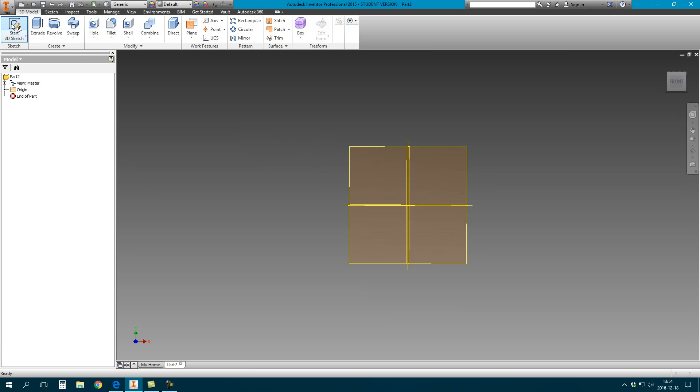But today we're not going to be making a drive shaft, we're actually going to start making our piston. The first thing you want to do is create a new object and choose standard millimeter, just like we did previously. Once you've done that, we're going to start making a new 2D sketch. Just choose any plane you want. I'm going to choose the XY plane, because it might be easier that way. It won't make much of a difference though.

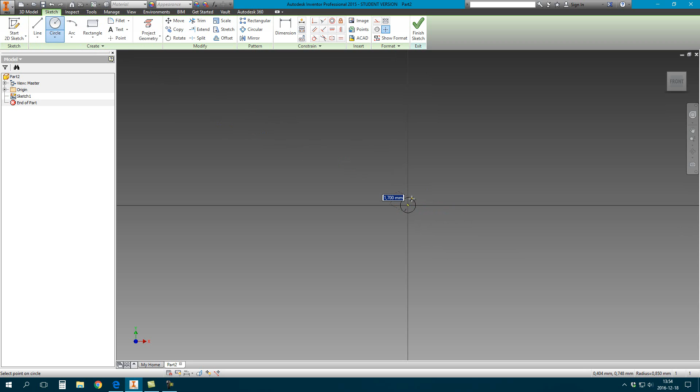Now we're going to start making the actual sketch for this. The first thing we're going to do is make a circle from the center point, and type in 20 millimeters as the radius. Then we're going to make another circle, with this one having 34 millimeters.

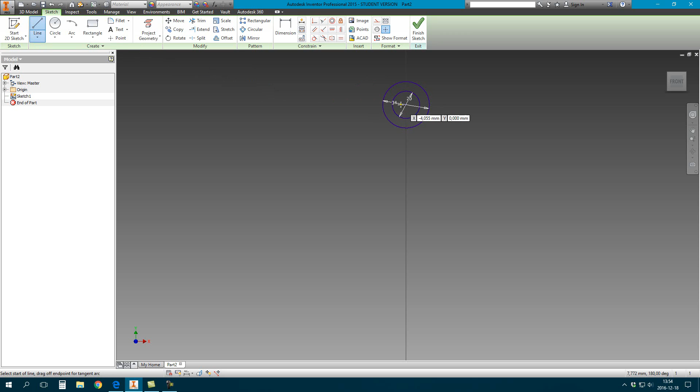Next, we're going to make a line straight downward from the center point of our circle. Choose the line tool, click the middle of the circle, put it straight down, and type in 170 millimeters. Press enter.

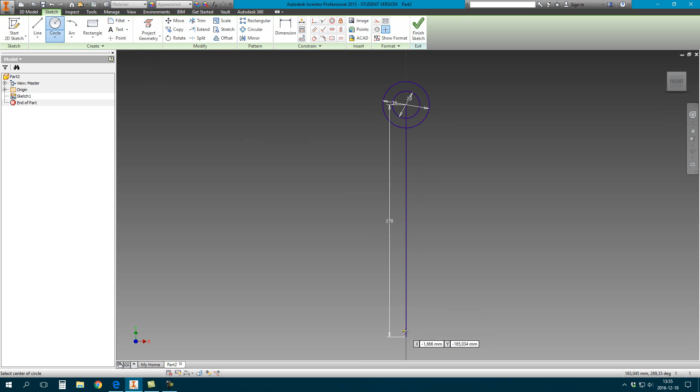Then we're going to make two more circles from the bottom of this new line that we just made. The first one is going to be 40 millimeters, and the second is going to be 60 millimeters.

Next, we're going to be adding some details to our sketch to make it appear more like the final project we're wanting. So first, select the line tool.

Then try and snap it to the very edge of the middle of the bottom circle. You can also type in the coordinates manually, of course. But once you've done that, draw it straight up and type in 20 millimeters. Then draw it to the side and try to snap it to the circle. It might be helpful to zoom in while doing this to make sure you've actually gotten a correct snap. A correct snap is achieved when that icon, which I'm demonstrating now, is shown and you have 90 degrees. Just click.

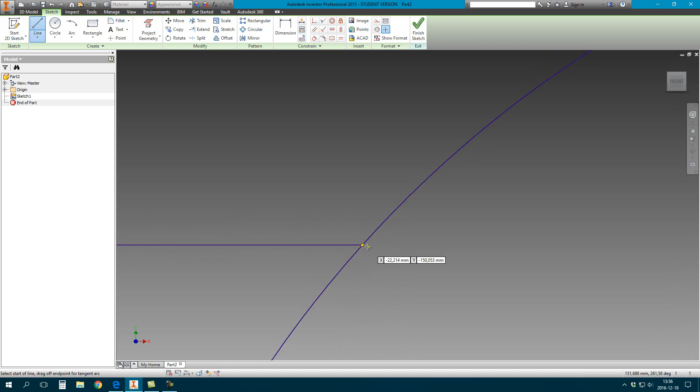Then we do the exact same thing except on the other side of the circle: 20 millimeters straight up, draw it to the left, and snap it.

Then we're going to add two more lines, and we're going to make these straight across the center between the two circles. So one there and one there. Make sure it snaps. And that gives us all the lines we need.

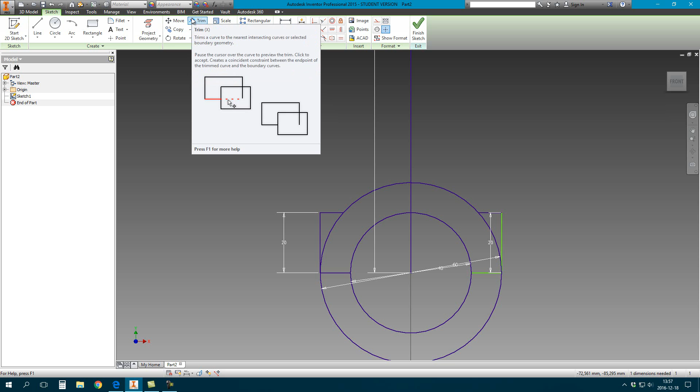Now we're going to be using the trim tool, so select that now. Once you've selected the trim tool, simply select the two lower arcs that I'm indicating. We're then going to remove two more arcs, namely the ones inside the sort of boxes we just drew, the ones I'm indicating right now.

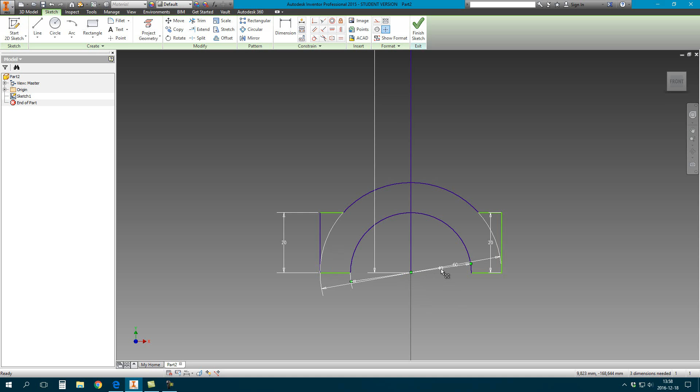Now, you might notice there are still white lines where we used trim. Don't be alarmed, because these are only the actual dimensions being shown here. So what we can do is pull these out of the way to get a clearer look at how our part looks. It's often a good idea to pull away the dimensions from time to time to make sure you can see properly.

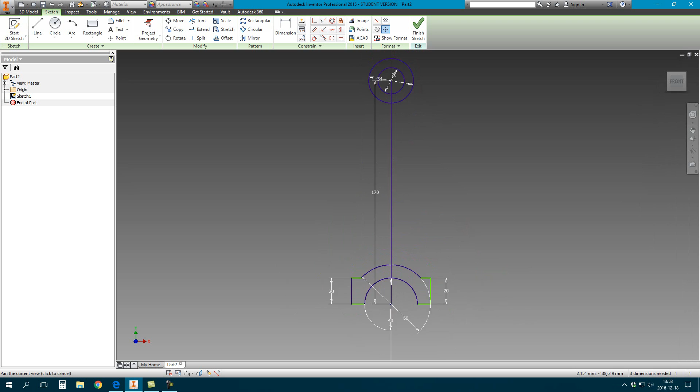Now we're going to add some more additions to this sketch before we're completely finished. To do that, we select the line tool, and then snap it to the center circle, straight in the middle of it, on the top one.

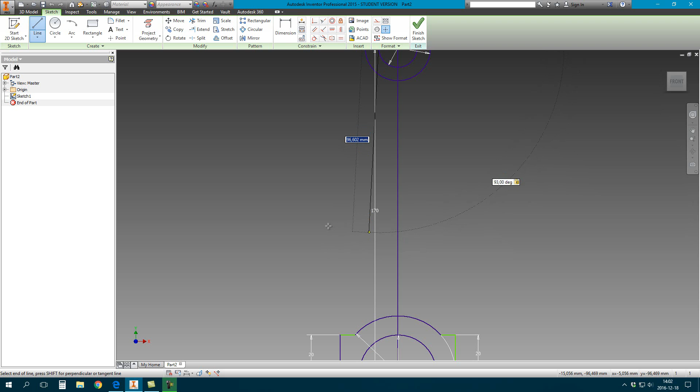And then you type in 93 degrees as the angle. Once you press Tab, you realize it is now snapped to 93 degrees, which is exactly what we're looking for here. So now put it all the way down until it snaps to the lower circle.

Might help zooming in to realize if it snapped correctly. And then just place it right there. Press OK to deselect the line. There we have the first line we need.

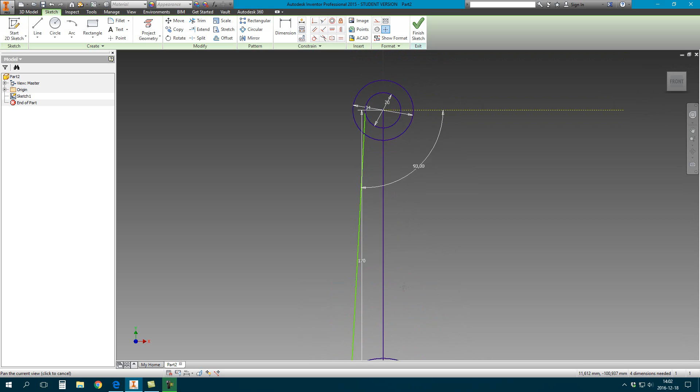We're gonna add another one on the other side of it, which looks identical. So select that. But you'll realize that if you type in 93 degrees, it won't actually give you the result you want, because now it will be 93 degrees in the same direction as the first one, meaning we've created parallel lines, and this is not what we want. Instead, you're gonna have to be calculating in the other direction. So you're gonna need 87 degrees.

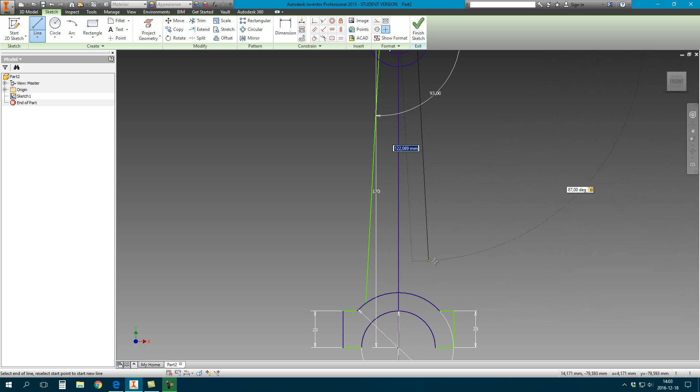And there we go, now it works perfectly. So just snap that to the line as well.

Now we're almost finished with the initial sketch that we need. First, try and pull away all the dimensions that are in the way, so that you can get a clearer look on how everything looks. Some of these cannot be moved, but most of them can, so try and move those out of the way.

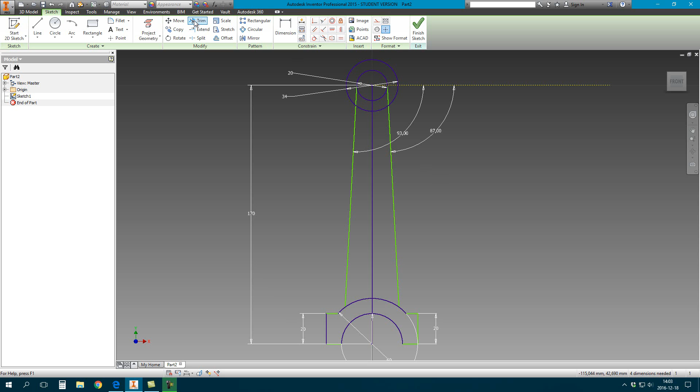Then we're gonna select the Trim tool again, and start trimming away the last lines we don't need. So just try and trim away all the lines that I'm indicating here.

Including the center line. We might actually have left that, and it wouldn't really have hurt anything, but it's good to remove the lines you don't need. It's good practice, really.

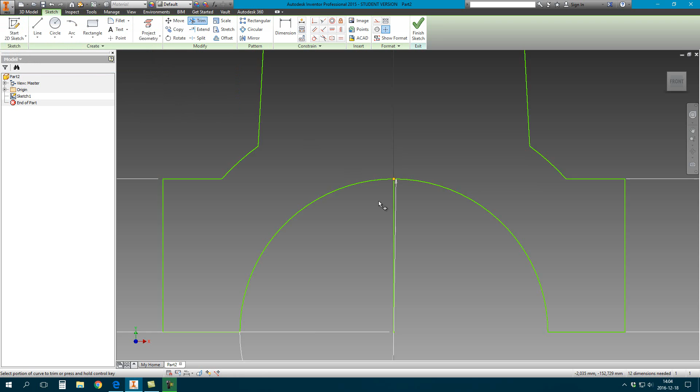Now you'll notice that when we tried to delete the last line, it said that it has a dimension on it. And this is the problem we encountered in the previous video. It simply means that we have a dimension on this exact line that we can't just remove via the Trim tool. So what we're going to have to do is try and find which ones are actually linked to this specific line.

And in this case, it's this big one here, because it goes from the edge of the small green line to the top of it. So that's the one we're gonna need to delete.

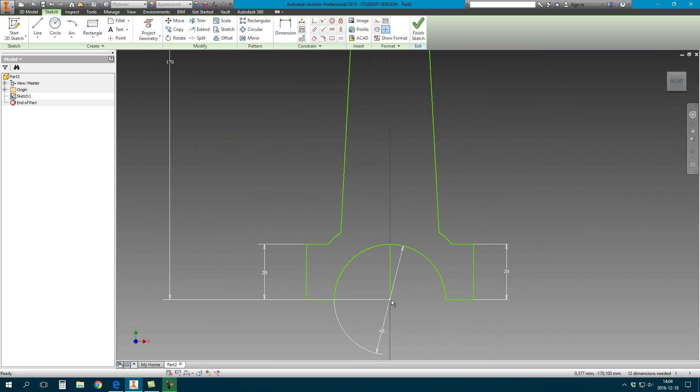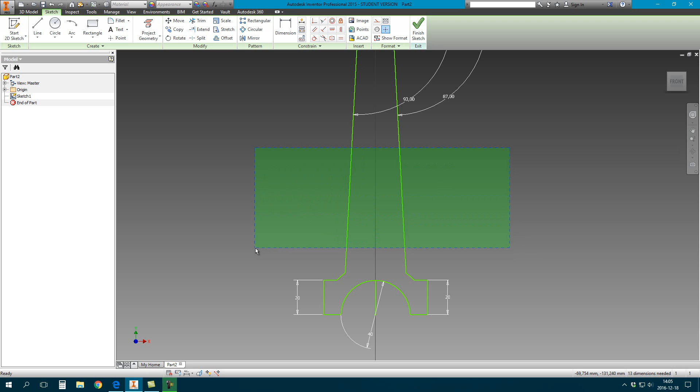So we go up, we select the large one. Oh, and by the way, this is an important fact: when you're selecting things, dragging to the left will actually select things, while dragging to the right will use a separate sort of selection mechanic that doesn't select most things. For example, it doesn't select lines if you draw to the right, as I'm trying to indicate here. However, drawing to the left will select these lines. It's important to keep this in mind when trying to select things.

Now we can use the Trim tool and remove that last bit of line that we wanted removed. We're then done with the actual initial sketch that we wanted, so we can just press Finish Sketch.

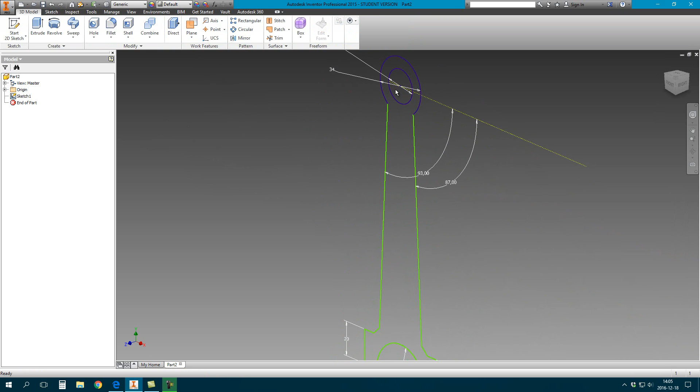We will then want to extrude this, so choose the Extrude tool, just like we did in the previous video. And select the entire shape we have. You'll notice we don't actually have to click on several shapes because we've trimmed away all the unnecessary lines. And then we type in 20 millimeters.

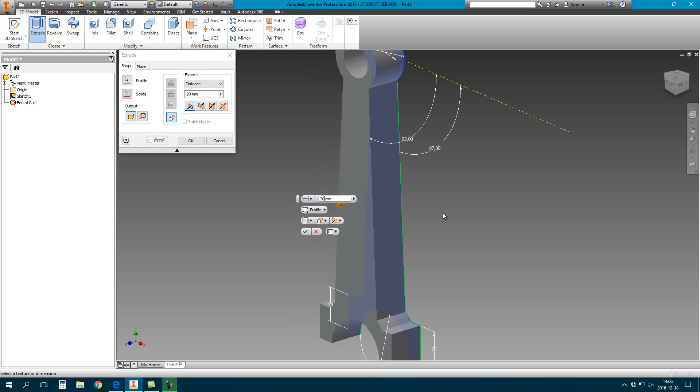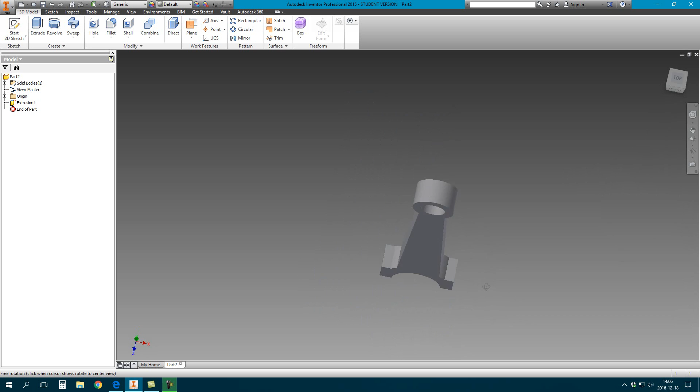Now we are actually finished with the main part of this piston, or actually the main part of this top half of the piston. We're gonna make the other ones as separate parts, so we don't want to worry about those right now. But there is one big feature that we're actually missing: we want screw holes on this.

So we're gonna make a 2D sketch. And then we're gonna select the planes that I'm indicating. And then we're gonna project both of the planes that I'm indicating here.

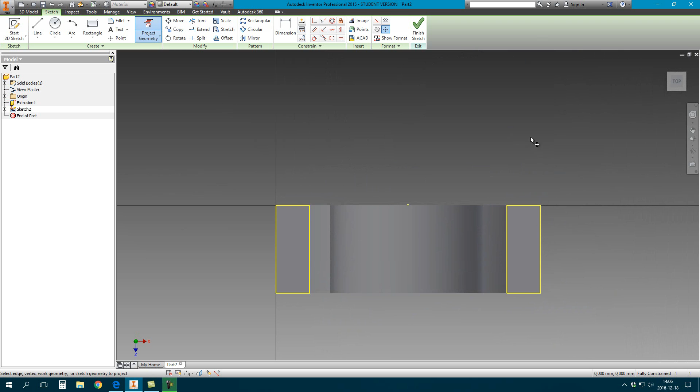We are then going to draw a line, so choose the line tool now. You'll want to snap this to the center of the left side line. And then we're gonna make a line that is 5 millimeters out. Here I'm just trying out some different measurements to see what fits best, but 5 millimeters fits best. So do that.

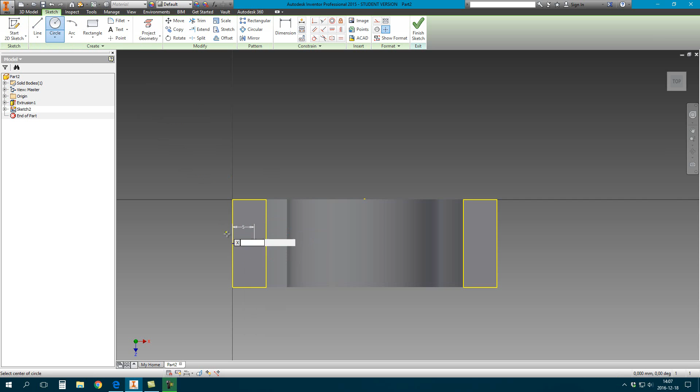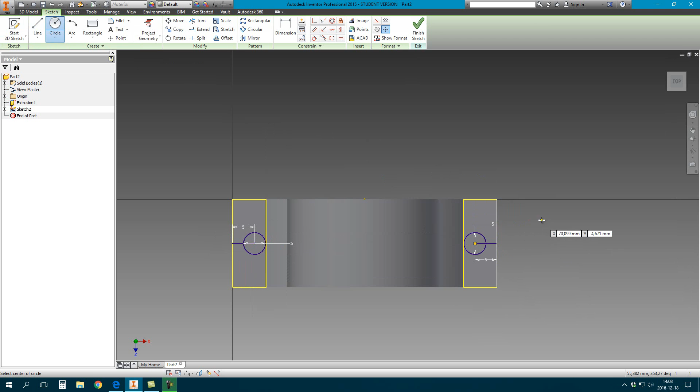Then we're going to make a circle, and make that 5 millimeters as well. And then we just do the exact same thing on the other side of the model, another line, 5 millimeters, this time from the right side, and a 5 millimeter circle from that line. And then we can just finish the sketch.

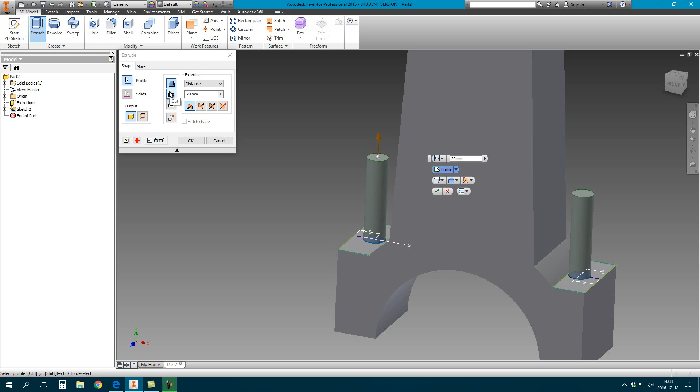We'll want to extrude these now, so choose the Extrude tool, and make sure to click on the small circles we've gotten. We then choose a small option in the extrusion menu called the Cut option. This actually makes you remove pieces of the part instead of adding them. So choose that, and you'll see that we're now making holes instead of building new things. Type in 20 millimeters in the distance, then press OK. We'll now have two 20 millimeter holes with 5 millimeter diameter, which is exactly what we wanted for our screws. We're then going to make a new sketch inside this new hole.

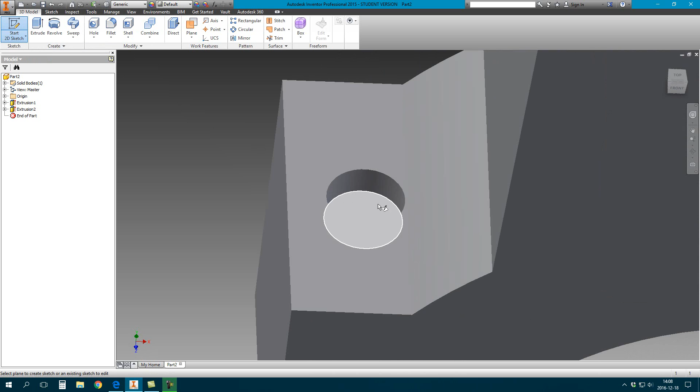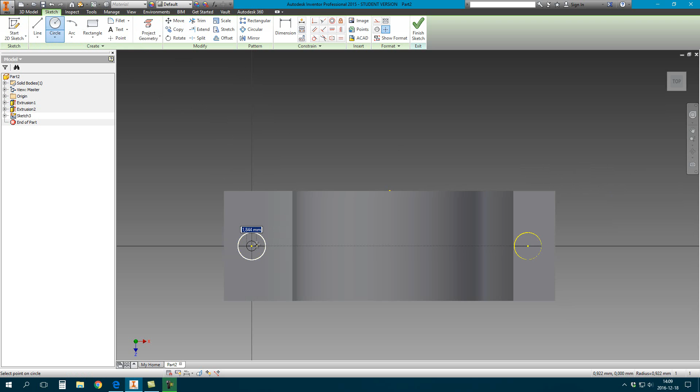So now we project again, but this time we actually project the circles we already have. And then we just draw 2 new circles with the same center point. However, these are going to be 3 millimeters. Do that for both of them. And then we can just finish the sketch.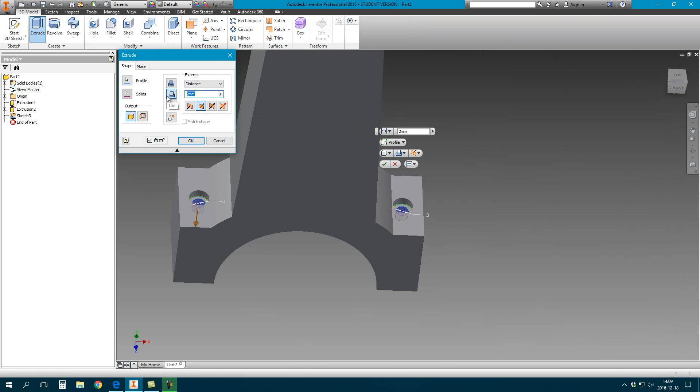And then we just extrude these just like we did the previous ones. Be sure to click the central parts of the holes, and choose the Cut option again, since we're actually making holes and not sticks. Type in 20 millimeters, and then press OK. And what we now should have is a hole straight through to the bottom, which is where we're going to attach our screws later on.

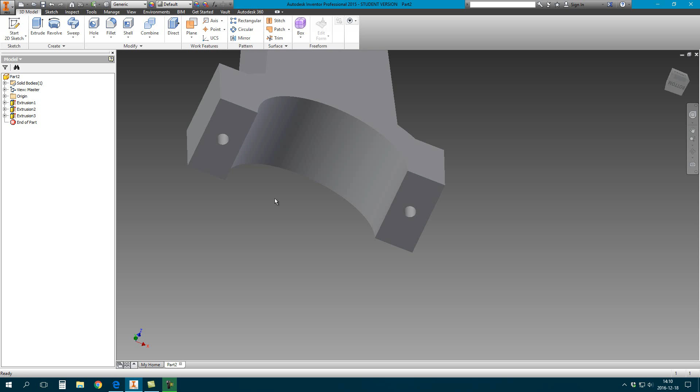Now, all that's left are some finishing touches. So, the first thing we're going to want to do is choose a color. I'm not actually sure what color I want on these, but I think I want some blue color to make it stand out from the red.

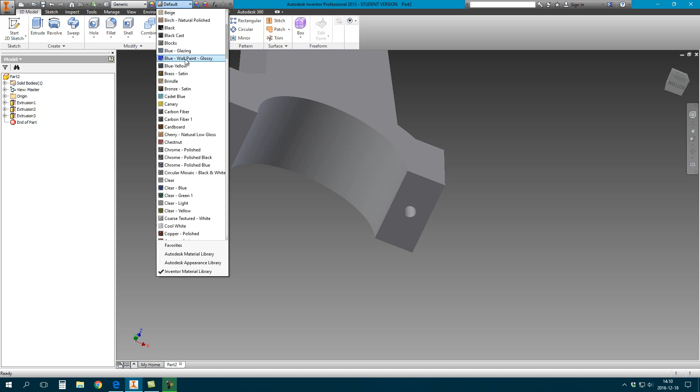Sky blue? Nah, that doesn't feel right. Maybe... nah, not white. Blue wall paint glossy. There. Of course, you can paint in any color you want, but try to coordinate the paint with the other parts I'm going to make later on, just so we make sure which part belongs to what.

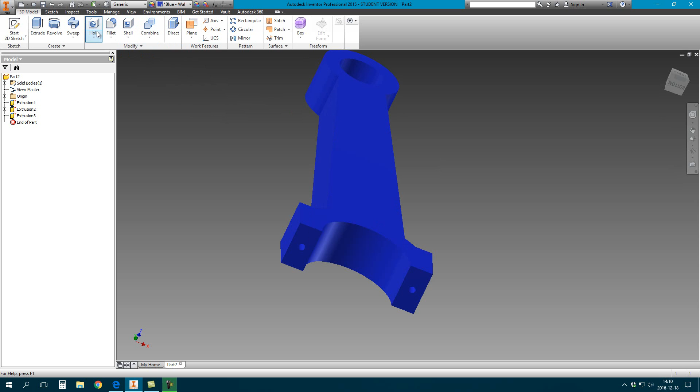And then we're going to make one last little adjustment, because these are actually screw holes and not spike holes, so to speak, or nail holes I guess they're called. So what we're going to want to do is go under the Hole submenu and select Thread. Now what this does is it actually simulates or emulates screws. So we're going to zoom in and click on the holes that we've just drilled through the part.

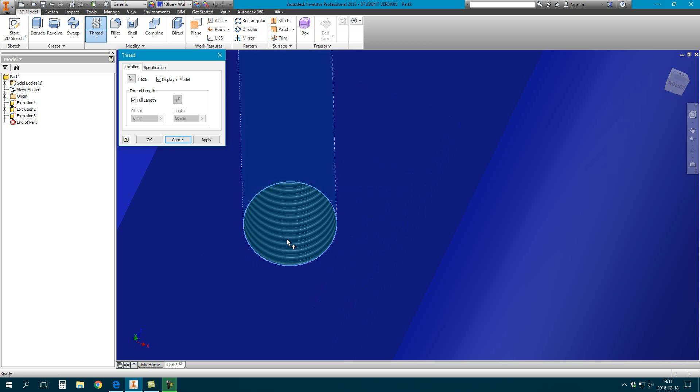And you'll see that they now look like you could fit a screw in them. You'll have to press Apply between doing it on both of the parts. And once you've done it on both, we are actually completely finished with this model. If you rotate it, you can see that it only gave it to the bottom half, which is exactly what we want. The top half is just for sinking the screws in.

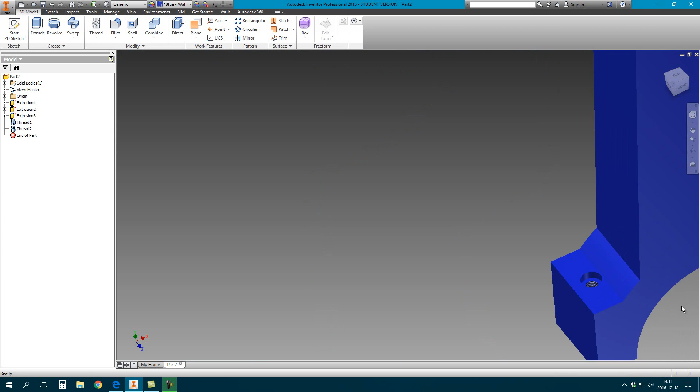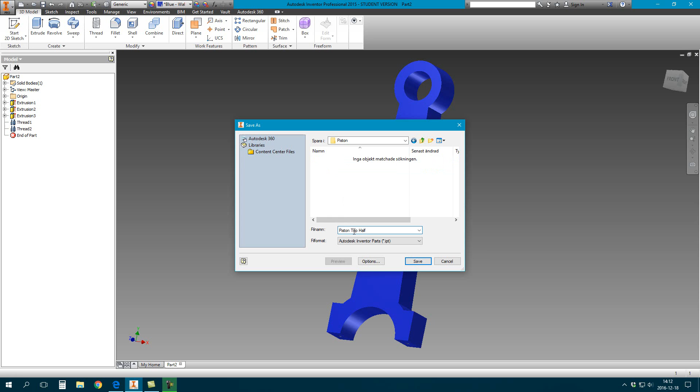Now, we just save this like we would any part, and you find the folder you had previously. So in my case, it was my V8. Then you create a new folder inside that, and you name it piston. You open that and save this part as piston top half. And then we're actually completely finished with this model.